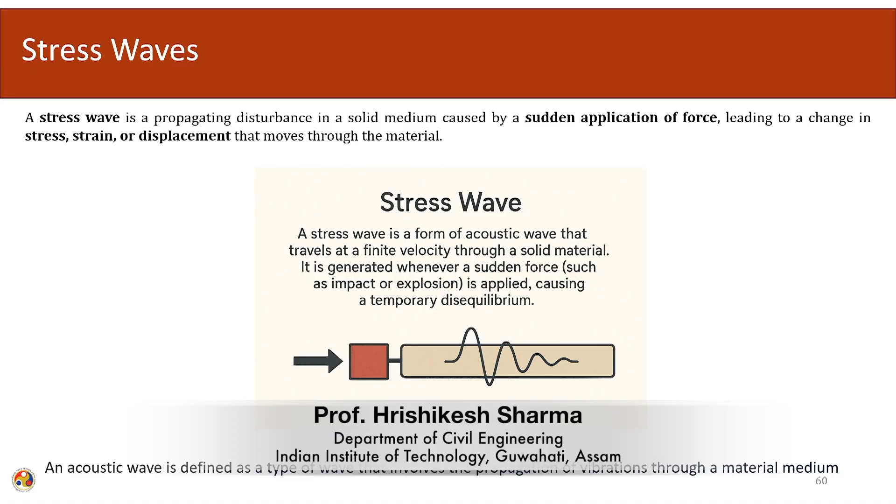So, what is a stress wave? A stress wave is basically a propagating disturbance in a solid medium caused by a sudden application of force. Like in case of impact or blast, as we have seen earlier, the forces are applied with a very high magnitude over a very short period of time. In this case the stress wave propagates through the medium.

So blast and impact both qualify as events where a sudden application of force is applied over a very short period of time, with high magnitude of pressure or force, and hence the stress wave is transmitted through the media. The induction of the stress wave leads to a change in the stress profile, a change in the strain profile, and the displacement also changes as the stress wave moves through the material.

Stress wave. The formal definition we introduce like this: a stress wave is a form of acoustic wave that travels at a finite velocity through a solid material. It is generated whenever a sudden force, like in case of blast or impact, is applied, causing a temporary disequilibrium. An acoustic wave is defined as a type of wave that involves the propagation of vibration through a material media. So we are dealing with material medium propagation.

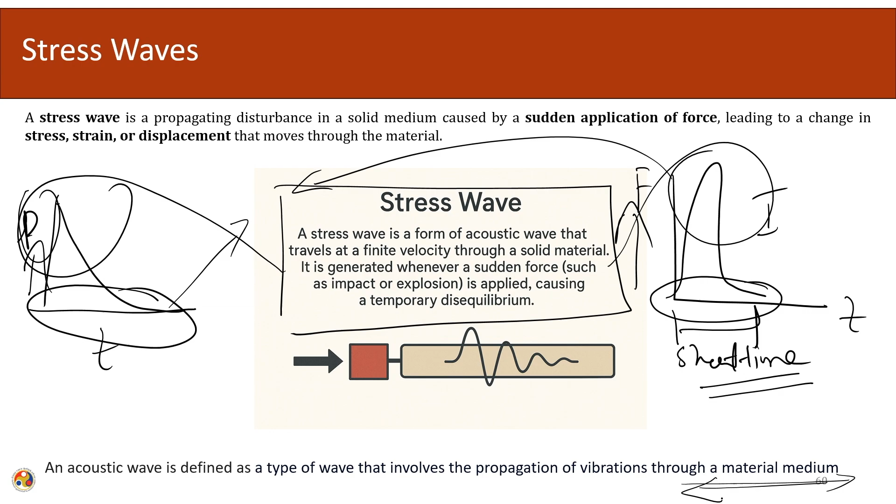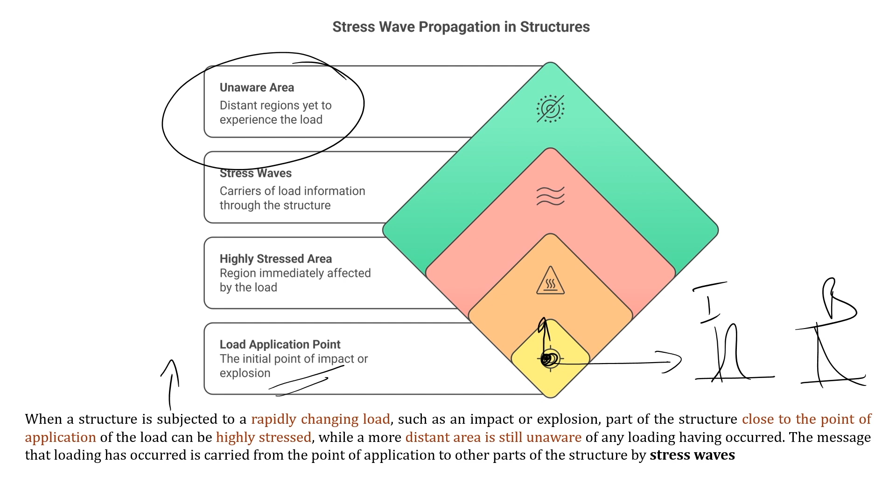Once the propagation continues, the region immediately affected by the load has a very high stress concentration or strain concentration. The stress wave then propagates further; it is a carrier of load information throughout the structure. So our stress wave is propagating through the structure, and in the distant areas, since this event has occurred here, there are regions distant from the propagation point which are yet to experience the effect of the stress waves.

So when a structure is subjected to a rapidly changing load such as impact or explosion, the part of the structure close to the point of load application can be highly stressed, while a more distant area is still unaware of any loading having occurred. This area at the vicinity of the application of the load becomes highly stressed.

If you look into a bar which is hit by an impactor, in this region the concentration of stress may be very high, while the end region might not have yet seen the arrival of the wave. The message that loading has occurred is carried from the point of application to other parts of the structure by the stress wave. The stress wave carries the information that the structure has been hit, and propagates like this. This is how the stress wave is quantified.

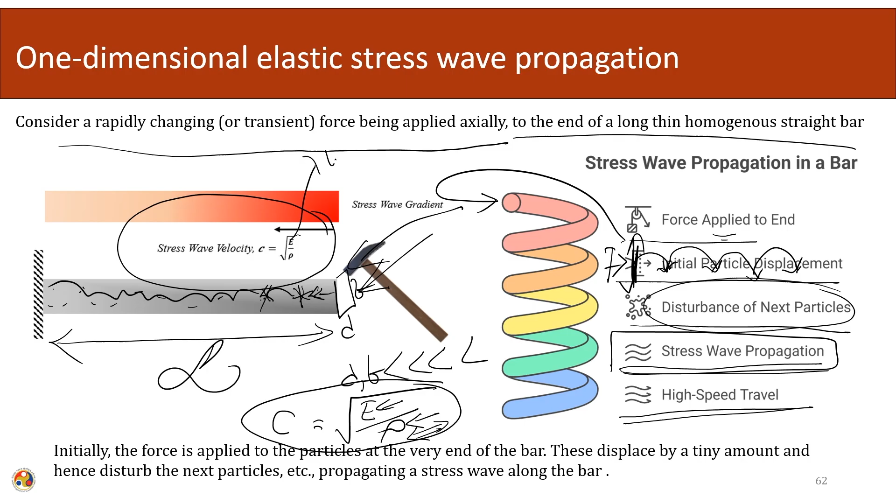This is the Young's modulus of the material, and this is the density of the material. This equation has many applications in the field of non-destructive testing and in the field of finite element method, and as we go through the course, we will be discussing it when we encounter this equation in other fields.

Initially the force is applied to the particles at the very end of the bar, as we said, that in this bar at the end the impact occurs. This displaces it by a tiny amount, the initial disturbance occurs, and hence it will disturb the next particle, disturbance of the next particle occurs, and then the stress wave propagates along the bar.

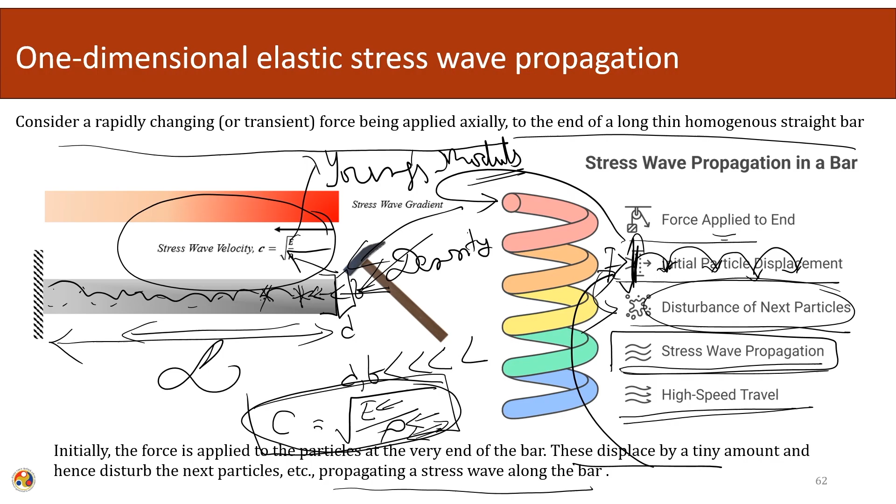The propagation of the stress wave is in the bar. This is a very simple case in which the propagation of the stress due to an impact event is being shown. Moving ahead, now we will try to calculate some quantities, the stress wave velocity and the one dimensional stress wave equations.

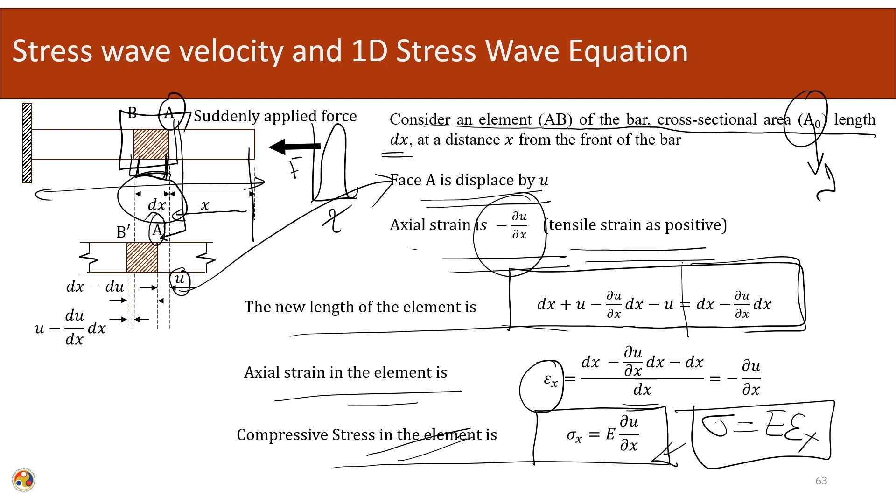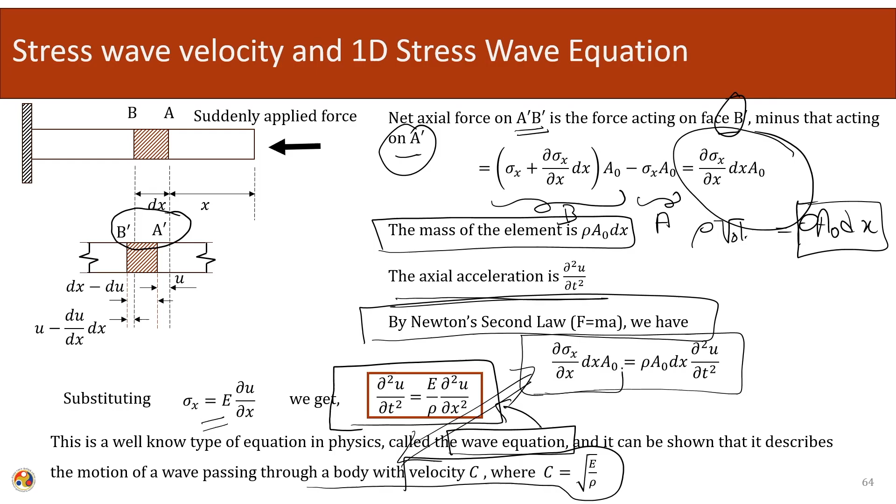Using the second law of motion relating forces with acceleration, we formally represent the equation in one dimensional space and time. U is the displacement of a material point at a given position and time, and C is the wave speed of the material. This expression gives the spatial curvature of the displacement, that is the strain gradient, and this equation gives the acceleration.

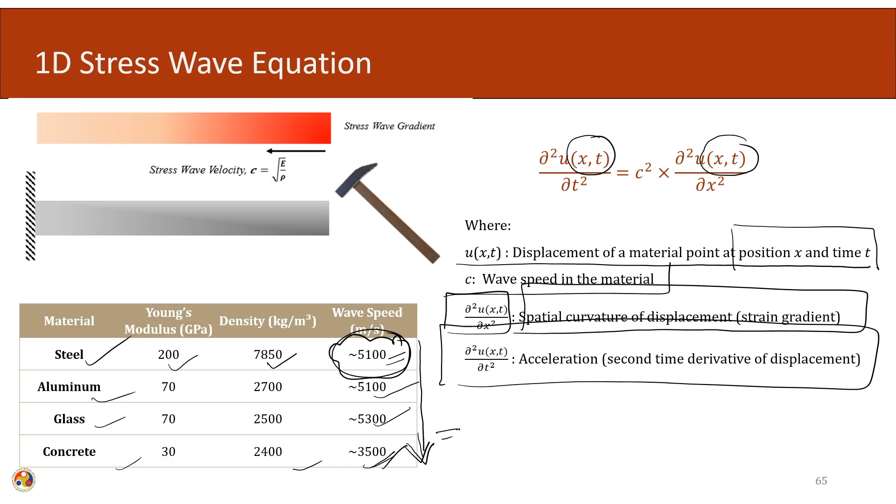Moving ahead, the relationship between particle velocity and stress. Although a stress wave may move through a body at a tremendous velocity, as we have seen earlier around 5000 meters per second, which is very high, the actual velocity imparted to the particle in the body by the stress wave is typically very small.

A direct correlation can be obtained between the velocity of the displaced particle as a stress pulse passes and the magnitude of the stress. Using our old relationships, stress is related to strain, and modulus of elasticity is related to the stress wave velocity. Substituting, we get this equation: the stress wave velocity is the speed at which the wave passes along the bar, directly relating stress to the modulus of elasticity and density.

Now we get the relationship between stress and particle velocity. This is the particle velocity, and this is the stress in the material. Using this equation we can get the direct relationship between stress and particle velocity. For a given case, C and rho will be constant, so for solids at elastic strain level, the values of C and rho are roughly constant. There is a linear relationship between the magnitude of the axial stress and the velocity imparted to the particles, so the axial stress is directly proportional to, and linearly related with, the velocity imparted to particles in the body as the stress wave passes over them.

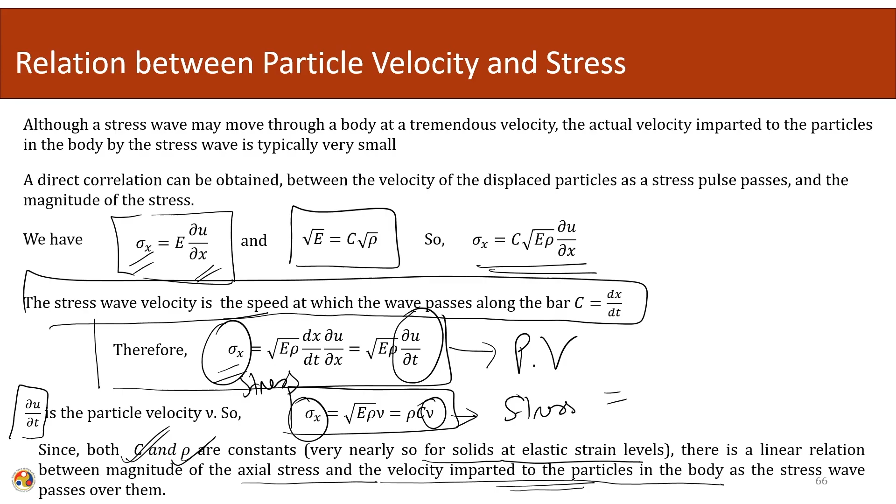So this is the expression, the equation. This has some resemblance to Ohm's law, with stress and particle velocity corresponding to voltage and current in a circuit. In this analogy, the product rho C corresponds to the resistance. So if this is stress and this is velocity, the quantity rho C can be written as a resistance, also called the acoustic impedance of the body through which the stress wave is passing. So we are introducing a term called acoustic impedance, which is nothing but a form of resistance when a stress wave passes through a media.

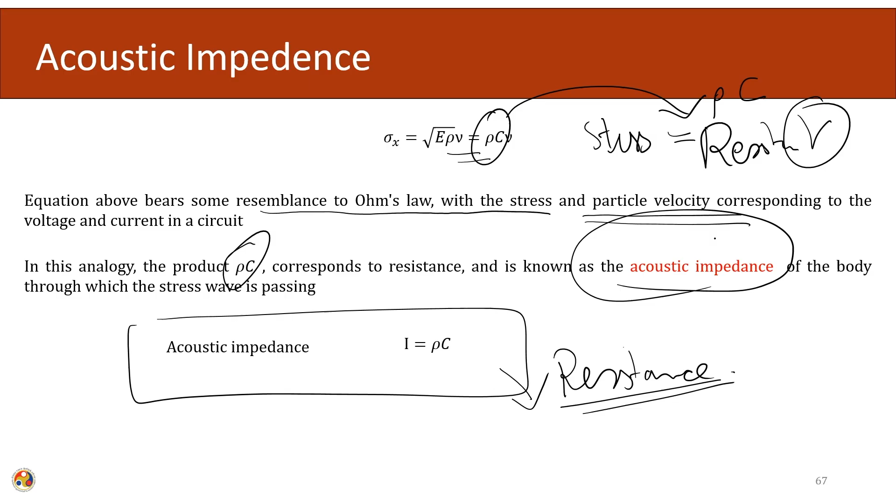The relationship between stress and particle velocity is given like this, and the constant is called the acoustic impedance, a form of resistance. This was the stress wave behavior in the body. Now we look at the stress wave behavior at the boundaries: what happens when the stress wave reaches a boundary? When stress waves encounter boundaries, for example material interfaces or free surfaces, their behavior is governed by the acoustic impedance.

Now we look more into acoustic impedance. Remember, it is a form of resistance where rho is the material density and c is the stress wave velocity. This impedance affects wave behavior at material boundaries, where there is an impedance mismatch. If there are two different materials, their C and rho will be different, so there is straight away an impedance mismatch. In one material there might be minimal wave reflection, and in the other significant wave reflection. In one there might be high wave transmission depending on the values of C and rho, and in the other low wave transmission.

Okay, so elastic reflection. If elastic reflection is occurring, then the elastic reflection preserves wave energy and momentum. In inelastic reflection, the reflection reduces wave energy and momentum.

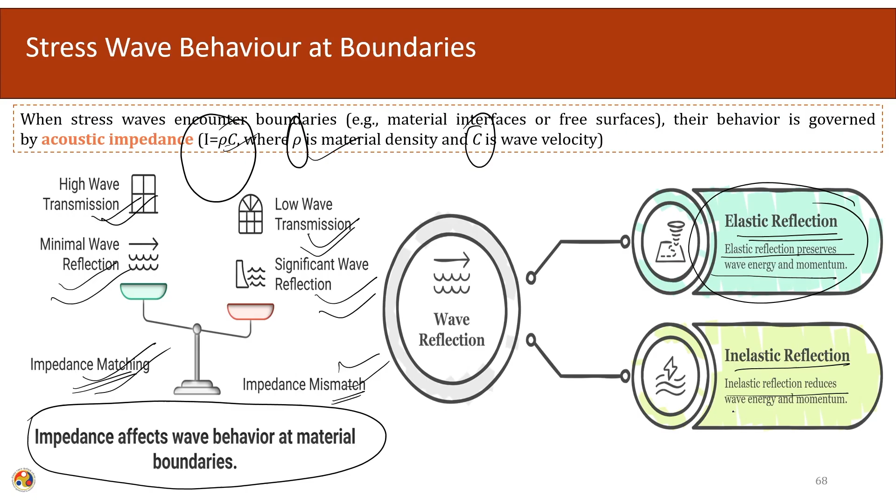Okay, reflection of one dimensional stress wave at boundaries. We will now see what happens at the boundaries when reflection occurs, the behavior of a stress wave in a bar which strikes a discontinuity.

For example, we are seeing if we encounter a case like this, where there is a discontinuity. This is the point of discontinuity where the cross section is changing, A1, A2, the modulus is changing, it is made up of two different materials, and density is different for the two materials, and the wave speed will, since this is dependent upon the E and rho value, automatically be different.

So we are considering a bar which at some point changes in cross sectional area and material. So both the cross sectional area and the material are changing. We will see how the stress wave behaves at this discontinuity.

We will assume that the incident stress wave is split into two parts when it hits the discontinuity. This is our assumption, the incident stress wave, and it is split into two parts at the moment it hits the discontinuity.

A reflected wave passes back into the first part of the bar, and a transmitted wave propagates into the second part. So there will be two parts: one part that will go through, and the other part that will be reflected from the initial wave. If this is the initial wave, there will be a reflected part and a transmitted part.

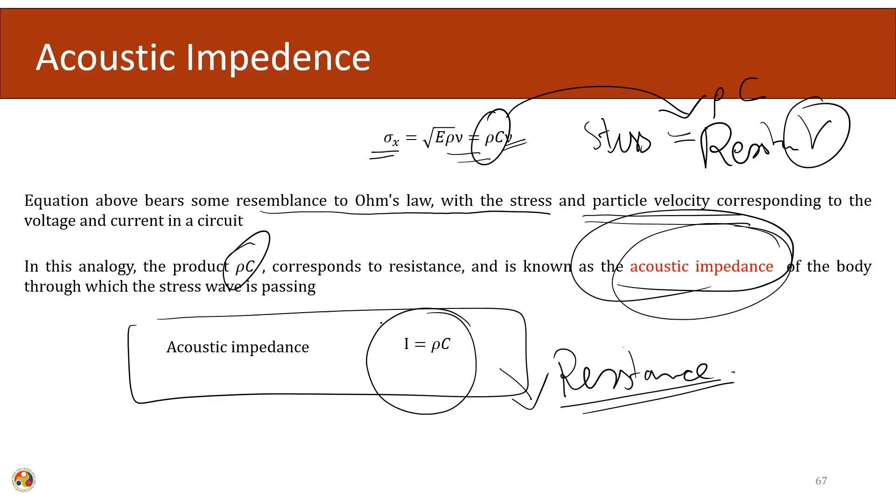And as we have seen, this was our equation for the impedance, I equals rho c. For the corresponding material, we will just put I equals rho c. So rho is constant, c is more or less constant.

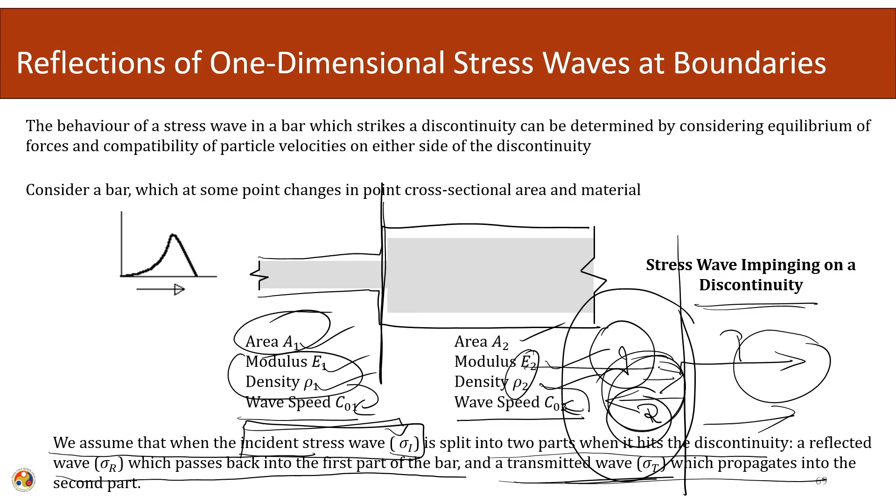Reflection of one-dimensional stress wave at boundaries. For the free surface, what happens when the stress wave hits a free surface? This is the simplest case of discontinuity. In discontinuity, the cross sectional area can change, the material can change. The simplest form is that there is nothing on this side. So we will try to look into what happens at the free surface.

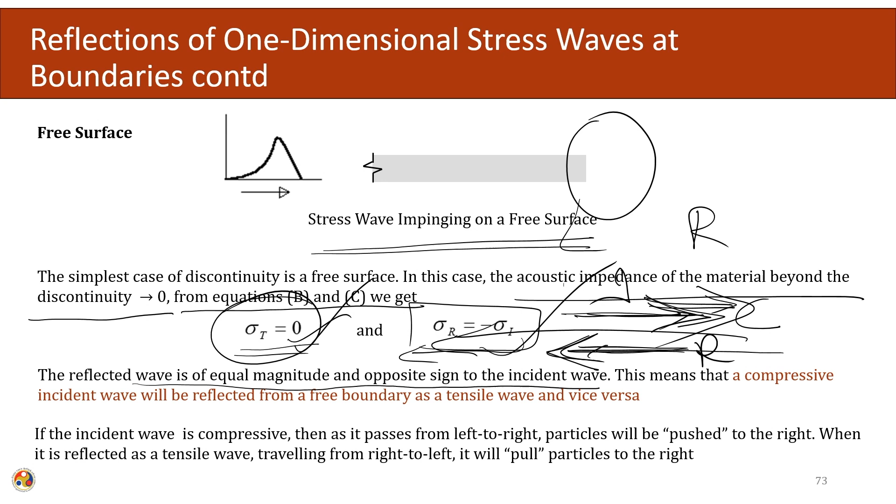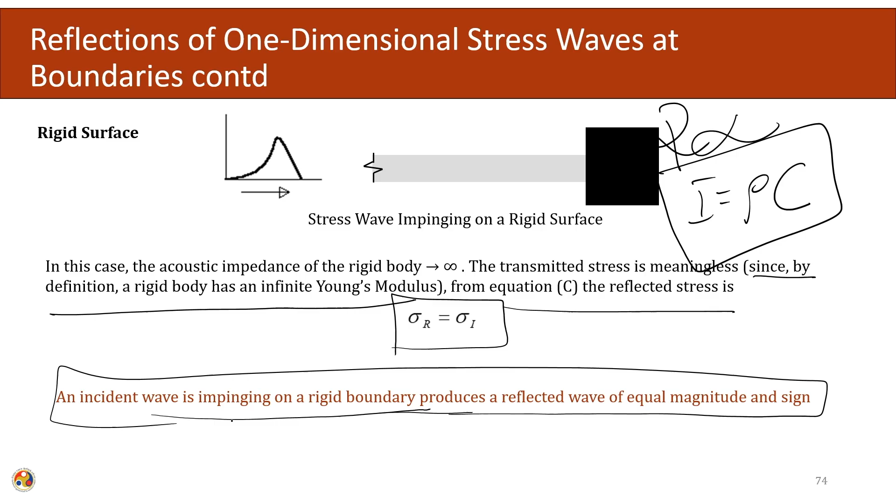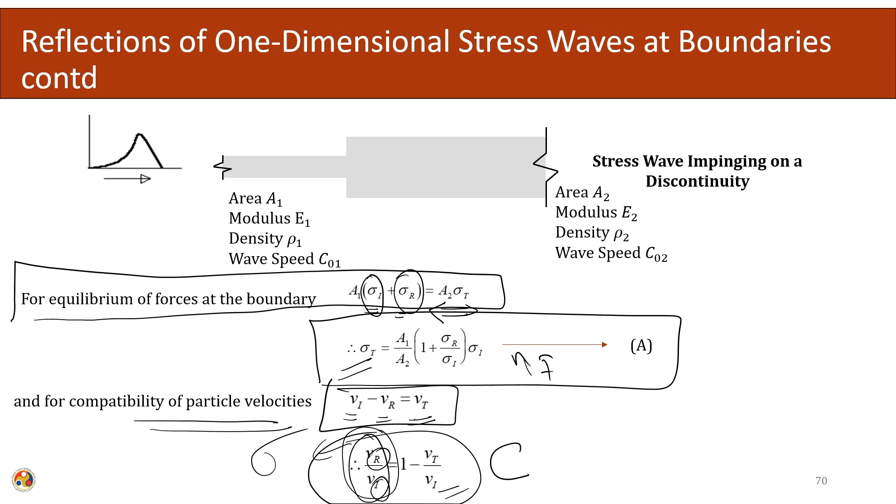Material discontinuity: here we are looking into a case where the cross section remains the same. So what we are trying to do here is that we had this initial equation, where we saw that the material and the cross section was different in both cases, and we derived a relationship between the incident wave and the reflected wave, and the incident wave and the transmitted wave. This term in the brackets was a function of both the material properties and the cross sectional area.

Now, what we are trying to do is see one by one. In one case we are keeping the material constant and see what happens with the relationship, and in the other case we are keeping the cross section constant and changing the material to see what happens.

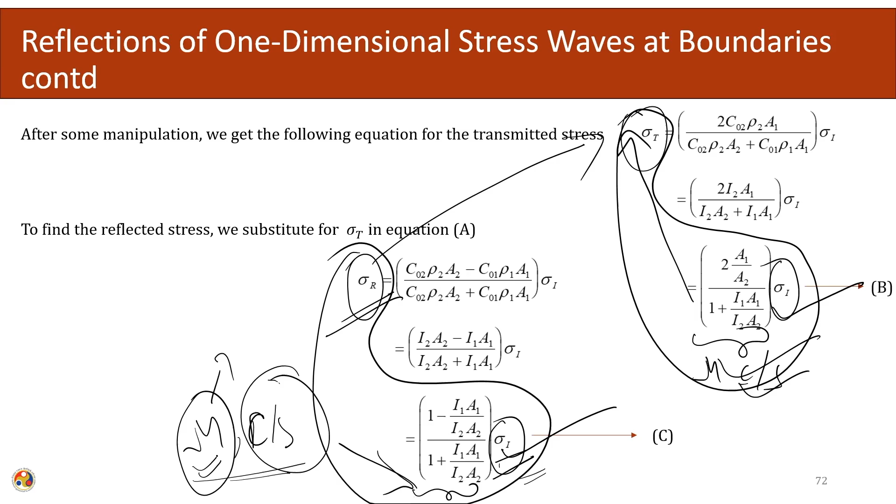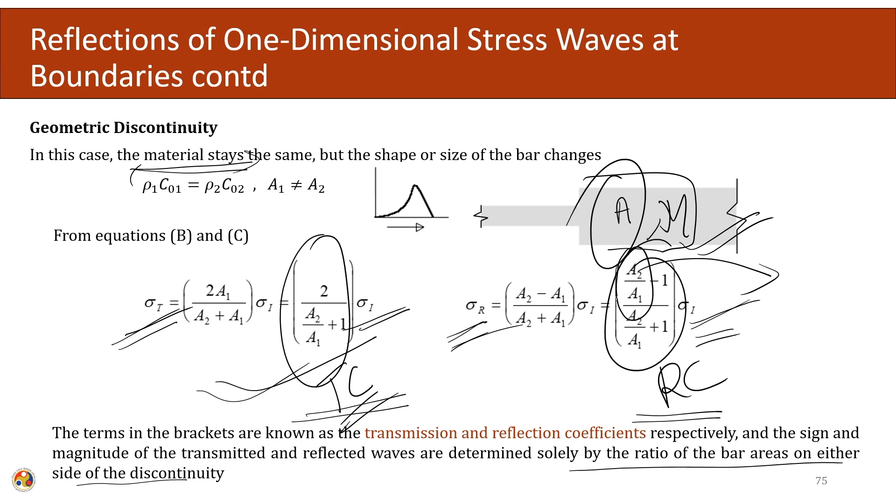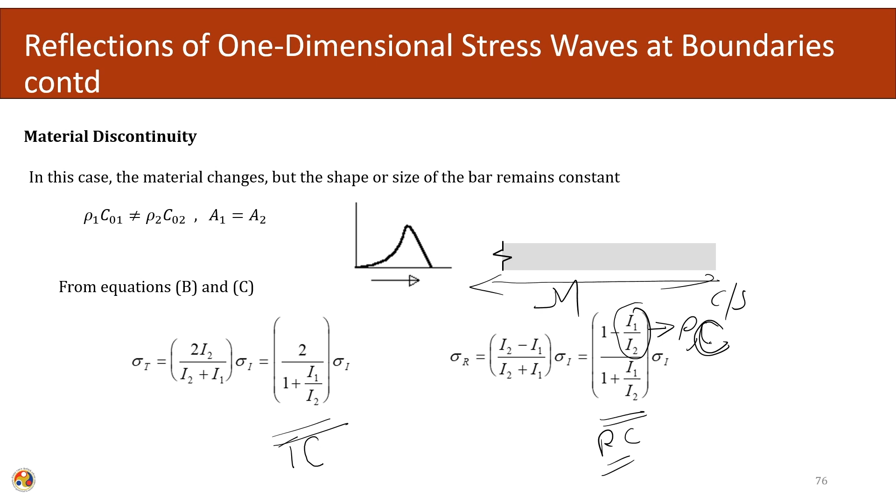In the second case, we keep the cross section the same but change the material. Again we will try to see what happens here. This again we can call the transmission coefficient and reflection coefficient, where the sign and magnitude will depend upon the density and stress velocity between the two materials.

Now we are trying to describe one very simple experiment, by which we can determine one dimensional stress waves. This is called the split Hopkinson pressure bar.

This is nothing but imagine playing the game of snooker. You have a finite particle, in the form of a ball, and you hit it with a velocity using your striker. The ball will try to move. In this experiment, we make it guided, so this hitting of the particle with a striker is in a guided form and the velocity is very high. Then we try to see what happens to this bar.

Then we try to measure the strain profile of the specimen. This is a very simple experiment used to determine the behavior of the material during a highly dynamic event.

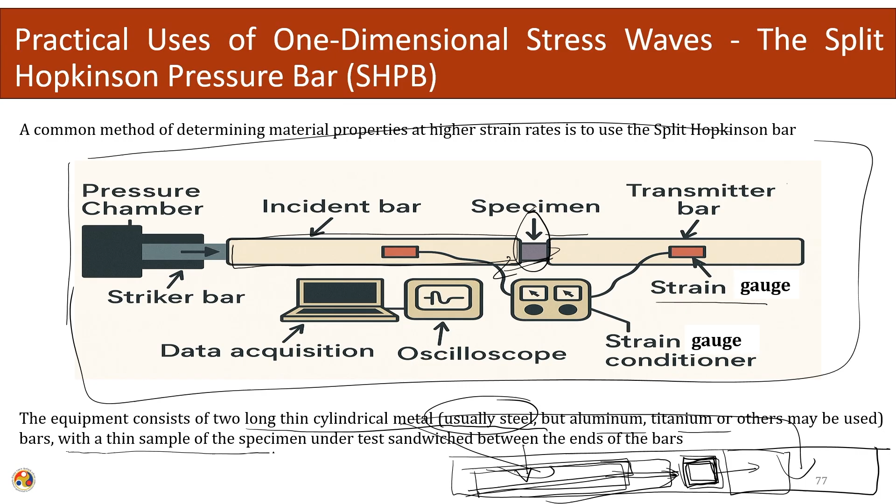This equipment consists of two long thin cylindrical metals, usually steel, though sometimes aluminum or titanium is used. These are the two strikers we were describing, and in between there is a very thin sample of specimen, whatever sample you want to test. It can be concrete, any metal, or any ceramic.

Using this experiment, we measure the strain profile, and the strain profile is related back to the stress profile, so we can get the material properties. Between these two bars, the material is being sandwiched.

Now we will try to analyze stress waves in the material. The striker bar hits the incident bar, wave propagation occurs, the wave interacts with the specimen, and reflection and transmission occur. When it hits, there will be a part that is reflected and a part that is transmitted. Since we know the material properties, we can calculate the quantities.

There is a strain gauge out here that measures the incident, reflected, and transmitted waves. We can get the entire signature of the incident, reflected, and transmitted wave, and the measured waves are used to calculate stress and strain within the specimen.

So this is a discontinuity. We know the values going out from here, and we measure the values out here, and using the relationship we can calculate the material properties from this simple experiment. Split Hopkinson bar testing is widely used to characterize materials.

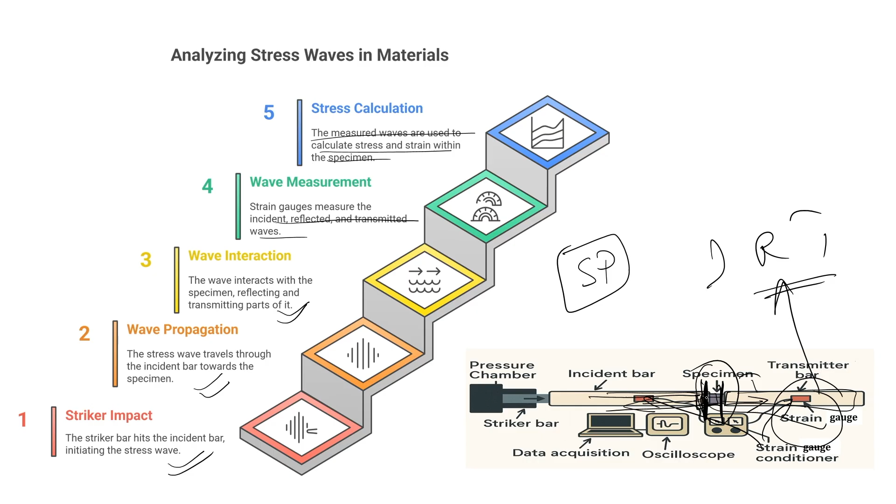Any unknown given material, we can characterize using the split Hopkinson test. So this is the split Hopkinson test - this is the theory described earlier, implemented for this experiment, and different quantities are being calculated here.

As you can see here, there is an interface between the incident bar and the specimen. This is the incident surface, this is the reflected one, and this is the transmitted surface.

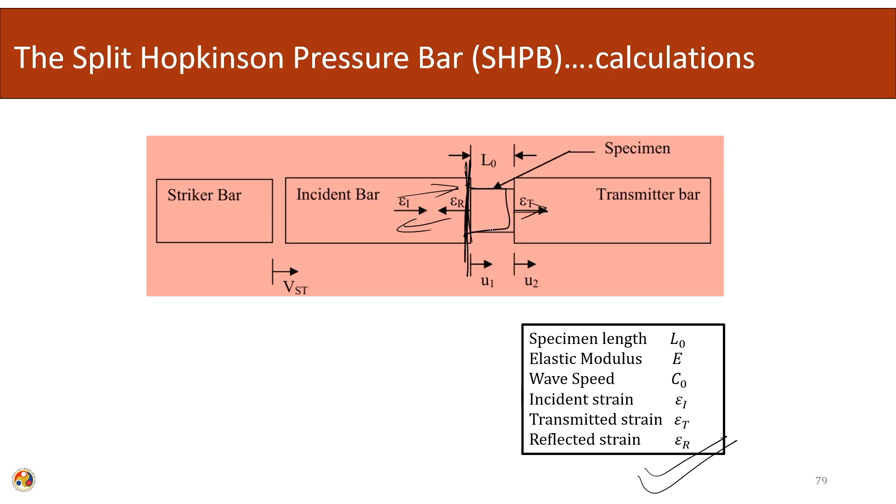We have the relationship, and using the relationship we can calculate the entire profile. If you go through these things, we have the cross sectional area and the properties of the bars, and using back calculations and measurements we can calculate the properties of the specimen. You can take your own material and characterize it to get the material properties in a very high strain event.